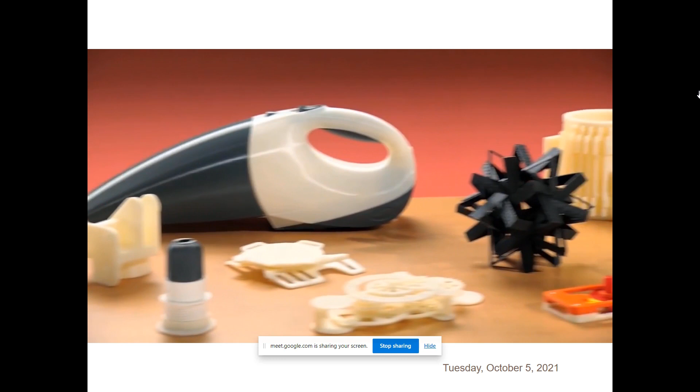Proven, powerful, professional. Introducing the uPrint SE and uPrint SE Plus, affordable in-house 3D printers from Stratasys. Now you can create durable, accurate models of your designs, iteration after iteration, right in the convenience of your own office. You can print models for proof of concept, product mock-ups, marketing tools, and more. Since Uprint SE prints in real ABS thermoplastic, your models will also be durable enough for functional testing.

And it's easy to use. Uprint SE's print driver automatically converts your CAD designs into print files. Just click print and your model starts building. Uprint SE keeps working even when you're not there. It integrates smoothly into your design process and into your office. It's quiet and clean—there are no messy powders, resins, or odors.

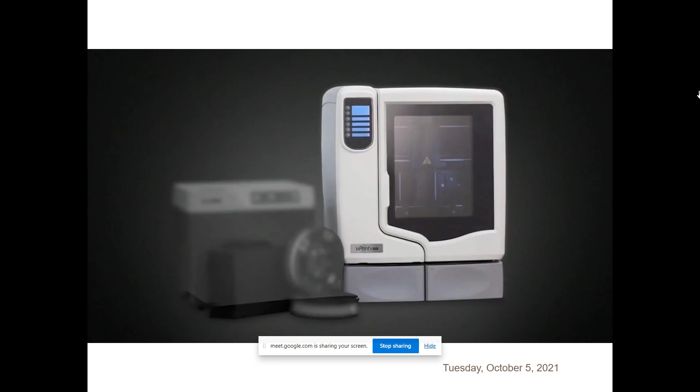The Uprint SE comes as part of the 3D print pack. Everything you need to start building models now: the printer, the support cleaning system, and even a startup supply of materials. There are no hidden costs and nothing extra to buy.

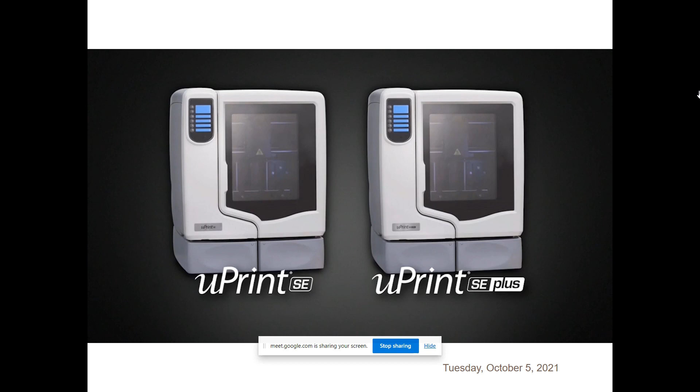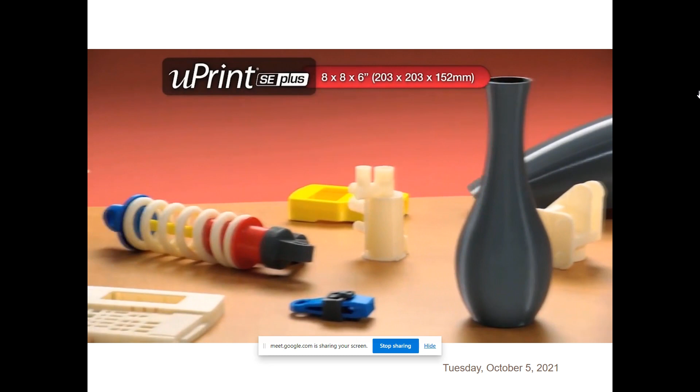And you have a choice of 2 models: the Uprint SE for ivory models up to 8 by 6 by 6 inches, or the Uprint SE Plus with a larger build envelope, faster print speed, and your choice of 9 modeling colors. Either way, you get a system that can help you evaluate, test, and improve your designs. Take control of the design iteration process with uPrint SE and uPrint SE Plus.

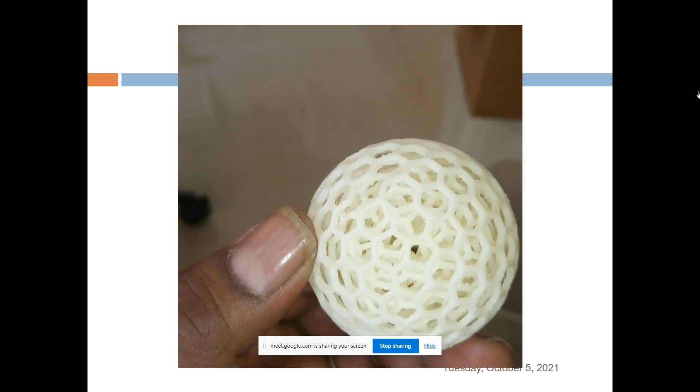So we have got the SE Plus printer, which means we use color cartridges also to print the model. What we are using is ABS material. ABS is a plastic material; it has a very low melting point and it's in the form of wires.

So there are reels of wire that we call cartridges, and these cartridges are very costly as far as India is concerned. It costs 20,000 rupees per cartridge, and you cannot manufacture this cartridge in India—or even if you manufacture it in India, you cannot use it in this particular printer.

So you have to strictly import the cartridges from the USA, because there is a sensor which will sense whether it is an original cartridge or a duplicate cartridge. If you create a cartridge in India, you cannot create that sensor, because the sensor will detect it as a duplicate and stop the printing. So you cannot use a duplicate cartridge; you must use the original, imported strictly from Stratasys company, which is very, very costly as far as India is concerned—each one has a cost tag of about 20,000 rupees.

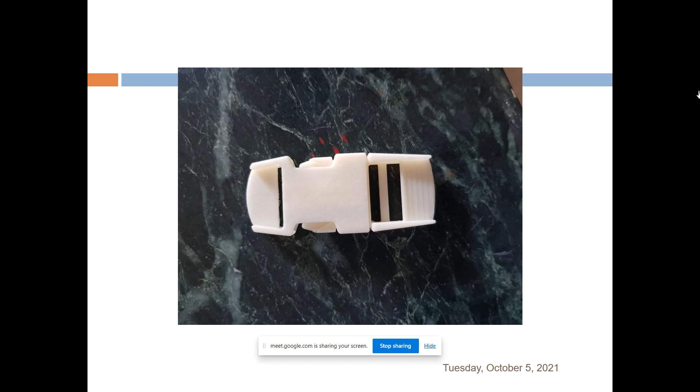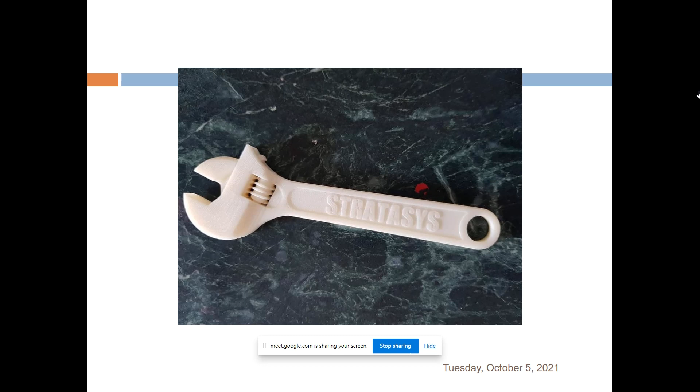Then this is a wrench. Again, it was printed as an assembly. This was also printed as an assembly. Assembly means I have not actually printed the individual components separately; I have printed the entire assembly together.

You might have seen in the promo video that there are three parts: first the printer, second the cleaning system, and third the cartridge. The cartridge has a reel of ABS material. The printer is the printing device, and there is a cleaning system where, after printing, we put the printed part into some chemicals to remove the supportive material.

Yesterday I explained the concept of supportive material. What is supportive material? If there is a hanging part, you have to give support to that hanging part, otherwise it will be very difficult to print the object. Without any support, it will not print.

Initially there is a plate, but if there is any hanging part - for example, say this is a pen which I want to print, and it is inclined to the ground, and I want to print it in this way - this is the overhanging part, there is no support. You can print the pen like this, that is possible, because it will rest on the plate.

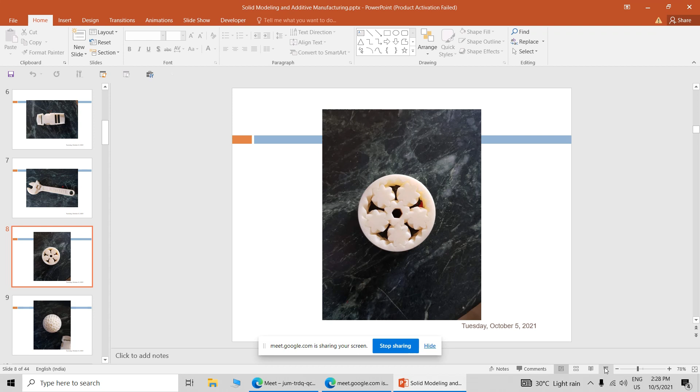But if you want to print the pen like this or this, then you have to give the support, particularly in the inclined direction. So that is the problem. There is supportive material, and supportive material gives support to the hanging parts.

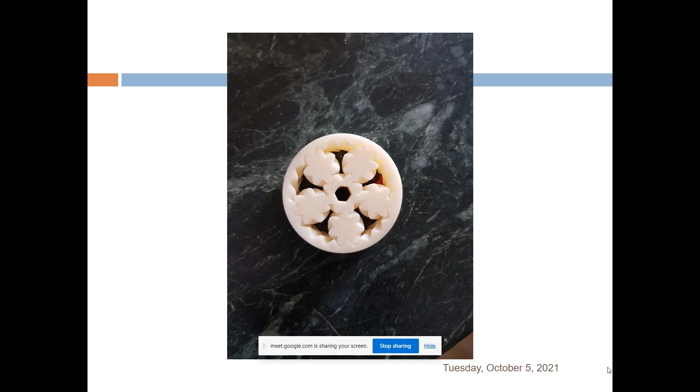For that purpose we use supportive material, and after printing we have to separate it, because the printed part and the supportive material are two different things. Many times it will stick to the supportive material, because at the time of printing the ABS material is in liquid form, and after solidification it may stick. For that we use the cleaning system - there is a bathtub in which we dip the printed part, and after some time it will heat the object and detach it from the supportive material, giving us the final output along with cleaning.

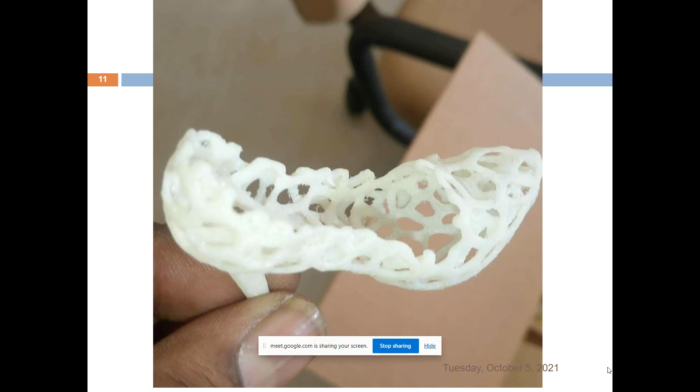This type of complex geometry can be printed with the help of a 3D printer, which is not possible to create with the conventional machining process. So these kinds of complex geometries can be printed with the 3D printer - that is the advantage of 3D printing or additive manufacturing process.

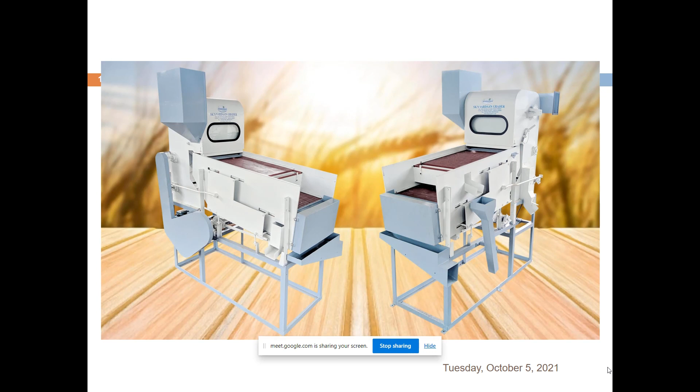Now we thought, why should we not print this entire machine? The objective of creating the entire machine was to create a functional model of it. This is the grader machine, a seed processing machine, initially developed by Padgilwar Industries Limited, Akola. When I newly joined the College of Engineering and Technology, we were developing this machine. It is not an indigenous machine, it is a copy of a European machine. European countries first developed such machines, but they were very costly - if we compare the cost of our machine with the European machine...